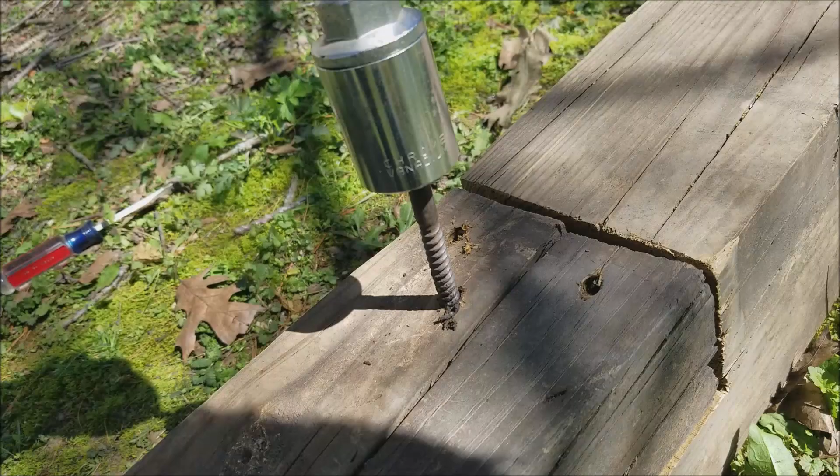Square drive lag bolt. I don't have a socket for that, so we're going to try this universal socket. Odds-on favorite is it just doesn't work at all, but we also have the possibility for breakage of the universal socket, the adapter, or the impact. Let's see what happens. Okay, I gotta say I'm a little bit impressed that nothing broke and it actually worked.

I thought it would be interesting to compare this with my DeWalt DCF 887 impact driver. Just for comparison's sake, the regular price right now for the Kimo is $90, and that's for the whole kit. To compare, the bare tool for the DeWalt is $139 on Home Depot.

Now you can see size-wise, they're almost the exact same thing. They're both on a 2 amp hour battery, both brushless, three speeds on both, and both have the light.

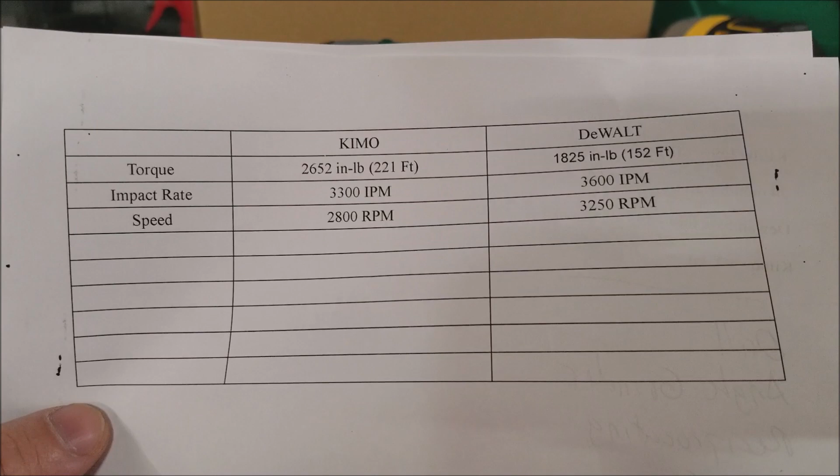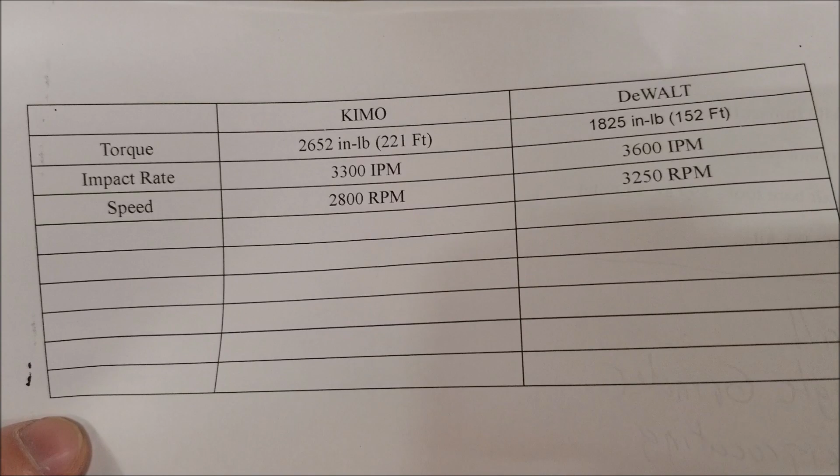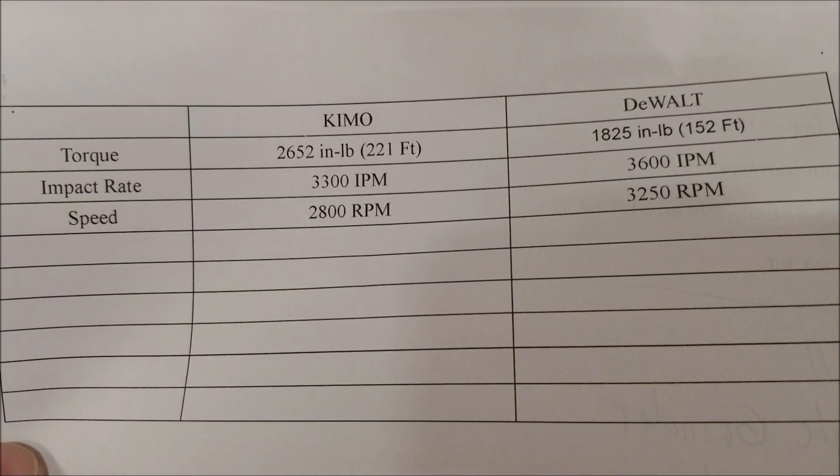Now, real professional like, I made a little chart here. You can see the torque on the Kimo is rated at 2652 inch-pounds or 221 foot-pounds, and the DeWalt at 1825 inch-pounds, 152 foot-pounds. The impact rate is 3,300 impacts per minute for the Kimo, 3,600 for the DeWalt. The speed is 2,800 RPMs at the highest on the Kimo, and 3,250 RPM for the DeWalt. So the torque is rated a little bit higher for the Kimo, and the DeWalt is a little bit faster, but I think pretty respectable overall.

Let's compare the weights.

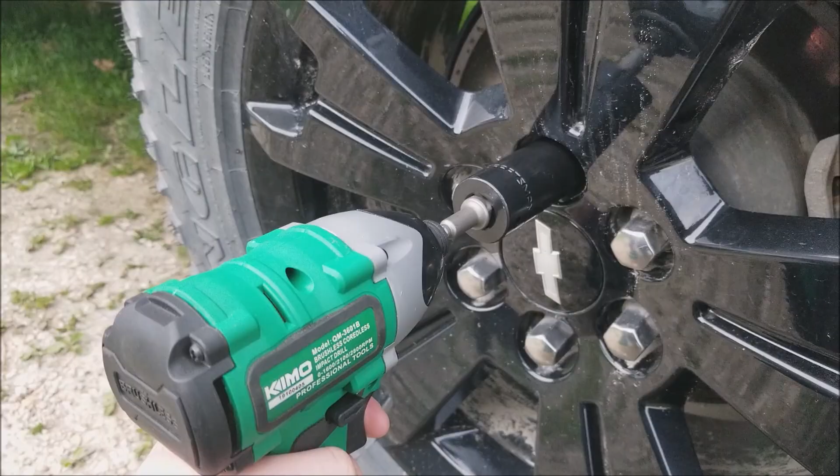No look at an impact driver would be complete without taking off lug nuts. So here goes. Well, it got it off, but it struggled.

Now here's the thing, the torque on my truck lug nuts is 140 foot-pounds. Common for trucks, cars are going to be closer to 100 foot-pounds. So if you have a passenger vehicle, a car, you'll probably be all right. If you have a truck, you're going to see a lot more of what you saw in that clip.

Now that we got a chance to take a look at it, I want to talk about some things I like and don't like about this Kimo. First off, I used it pretty extensively over the weekend. I'm building an addition to my shed, and there were spots where I would have preferred using an air nailer, but instead I used screws for every bit of it, and this was the only driver I used for the entire project. It's almost completely done by now, and this thing survived it just fine. It worked without any problems at all. So is it a capable tool? Absolutely capable. But is it the best option for you?

Only you can decide how extensive you would use such a tool, what other tools would have to be in the platform for you. Do you need a full platform like something DeWalt, Milwaukee, Bosch, or Makita has? Or the tools I mentioned earlier is all that you would ever need anyway, so you don't have to expand beyond that, or maybe you're just using it as a backup tool. Because again, the price we talked about earlier was the kit for the Kimo, and just a bare tool price on the DeWalt.